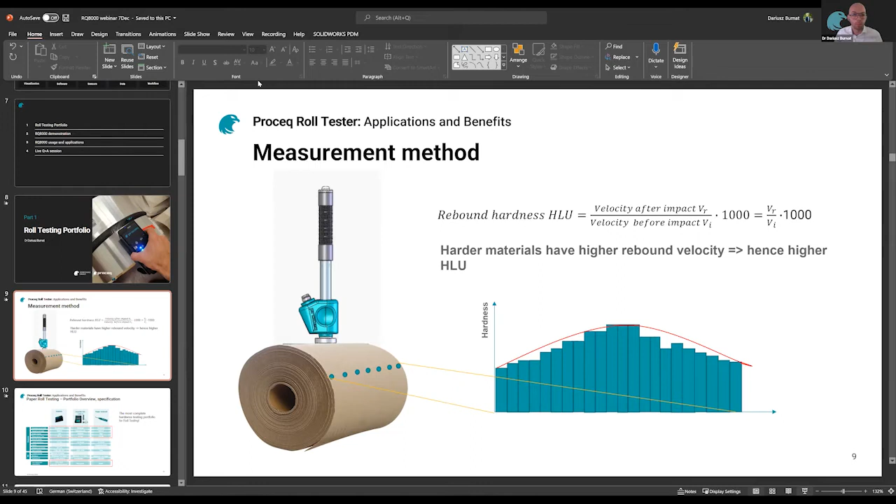Dariusz, could you share your full screen, please? We can see the presenter view. Oh, perfect. Okay, the floor is yours. And the audio, Dariusz. Right, perfect, perfect. So apologies for this little inconvenience.

I would like to welcome everyone in today's webinar. I hope you will enjoy the presentation that we have prepared for you. Today, we will show you how you can improve your quality processes, how you can minimize your waste of materials, machine downtime, and gain higher customer satisfaction. Before we jump in, I would like to very shortly discuss and show you how the hardness testing of rolls works on a very simple example.

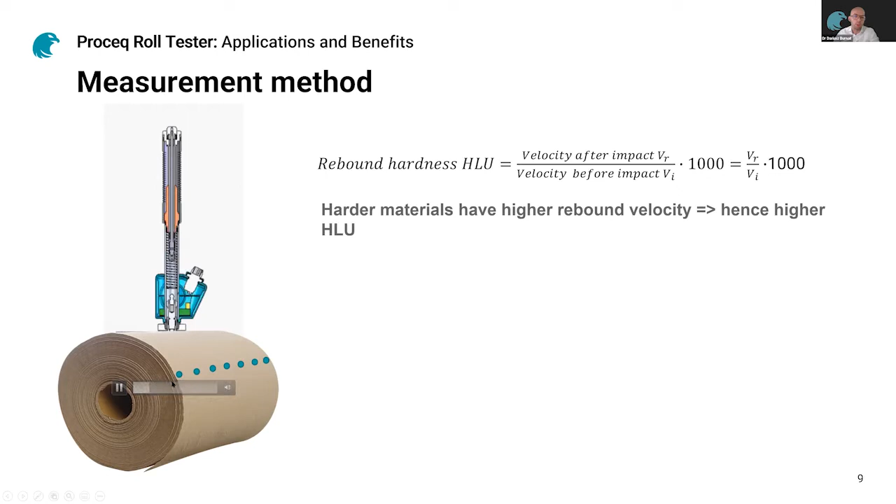Here what you see is the roll, and for this exercise we will use our Leeb method that is based on the rebound. The hardness testing principle works in a way that a specific device, which is here a coil, loads a hammer, or in this case an impact body, and shoots this against the surface of the roll. What is then done is we collect very specific points across the entire roll, and when we collect that data, as a result we receive a hardness profile. In other words, we can really scan the entire roll and see what areas are harder or softer, and later on we'll show you why this is of high importance for the roll processing and roll manufacturing.

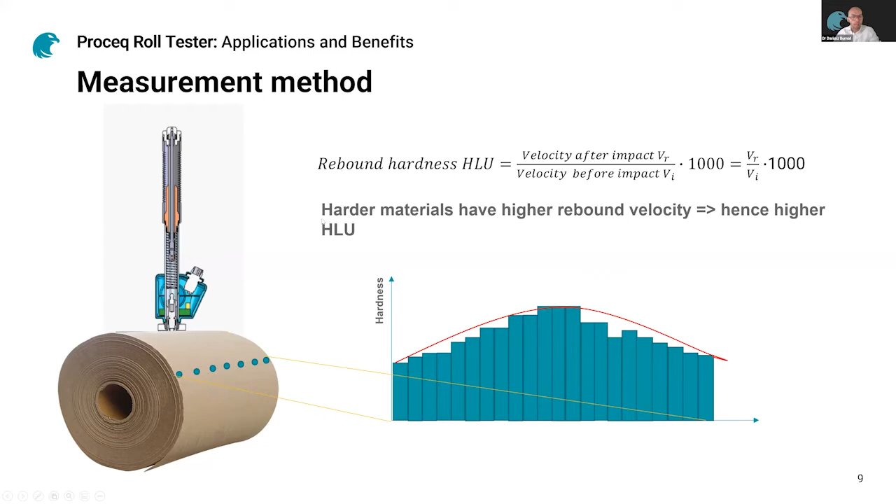In this simple example, we'll see how the HLU values are calculated. This is one of our products. In other words, what we measure is the rebound velocity. Let us now jump very shortly to our portfolio.

We're proud to announce that Screening Eagle Technologies, Proceq, has the most complete hardness testing portfolio on the market. We have three main products: the RQ8000, our very recent product that we have launched together with our technological partner Tapio, the Equotip 550 Leeb U, and the PaperSchmidt. Let me very shortly discuss the differences of these testing devices and what device would be best for your application. The main measurement principle for these three methods is the rebound.

However, the RQ8000, the product that we're going to concentrate on today, uses a slightly different feature, which is deceleration. In other words, we measure the opposite force of the acceleration, so how much the impact device, in this case the hammer, is being slowed down.

All of these three methods have slightly different sampling principles, starting from the RQ8000, which is measured optically, then the Equotip 550 Leeb U, which uses an inductive coil, and the PaperSchmidt, which uses an optical sensor. Now, the third option I would like to discuss is the impact energy, starting from very low impact energy through medium up to high, and the measurement frequency.

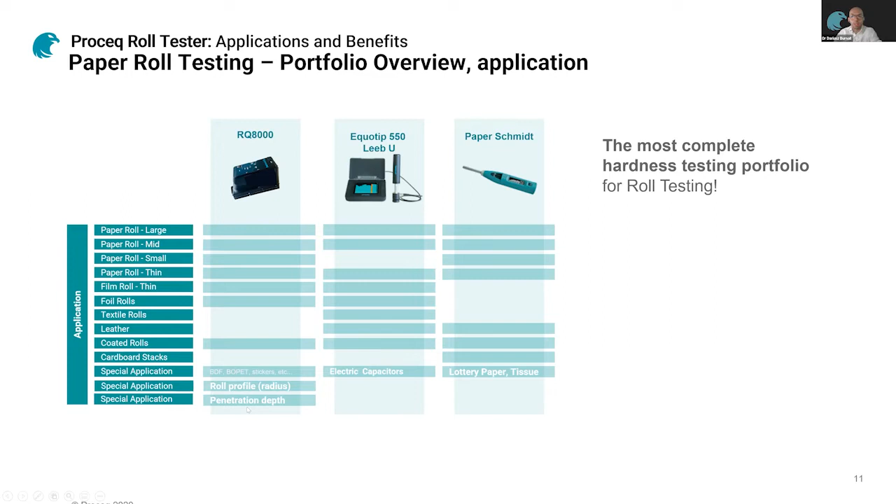Now let's jump to another slide to highlight what these devices can offer. First, cost savings. Hardness testing of rolls enables fast and easy detection of defects before they accelerate, or before you process the roll to the end, before you ship it to your customers. Because you can react early, you can generate massive savings on raw materials, machine downtime, and manpower, and you know well how this can increase material cost and the entire processing.

Not to mention customer satisfaction, because at the end you have fewer warranties and fewer problems with processing. Also, all of our devices have very good user independency—if you pass a device to another user, you will have similar or exact same results. And because all of our devices can test multiple materials, starting from paper to cardboard, aluminum foils, and plastic films, they are suitable for clients across the paper and roll testing industries.

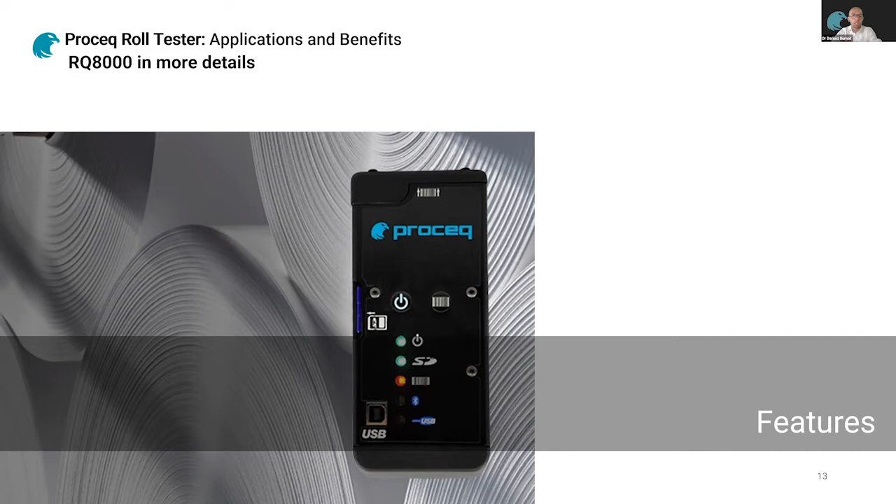Now let us jump very shortly to the application and benefits of our main feature here, the RQ8000, and I will briefly highlight what this method can offer and its specific features. Here on the right-hand side is a presentation of our device. This is the RQ8000, exactly the same device which I'm holding in my hands here.

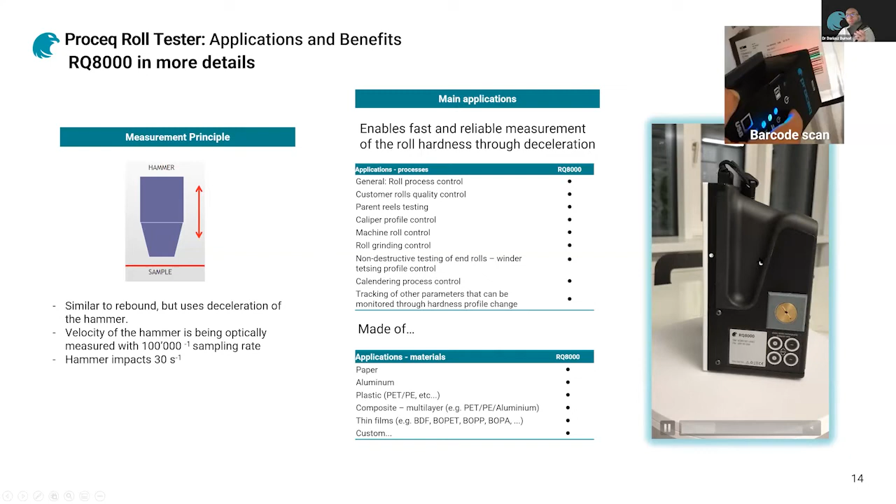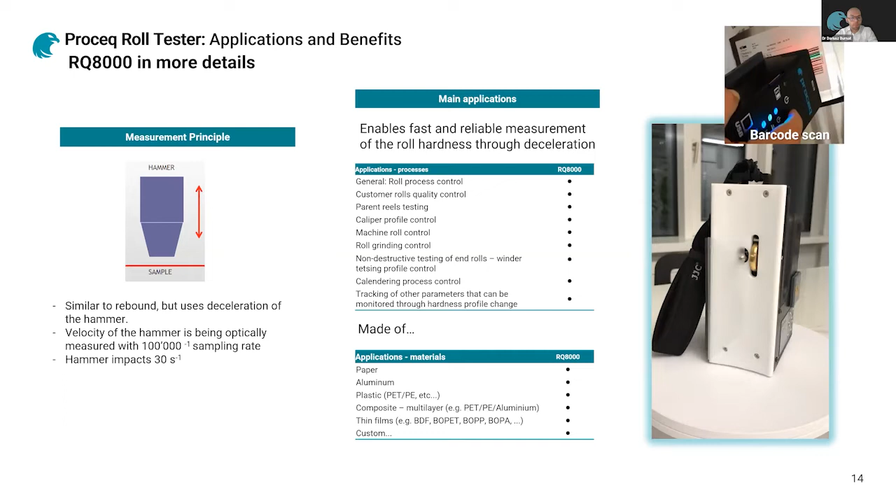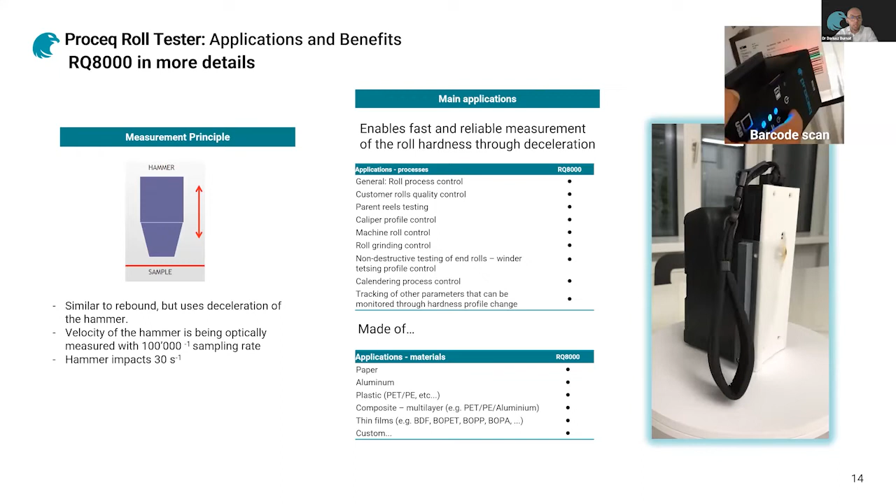This device is similar to the rebound method but uses deceleration. Nevertheless, it also has the feature to measure exactly in the same way as the Leeb or Paper Schmidt, which we'll highlight later. This device has extremely high resolution, optically measured with a very high sampling rate. Now the question is, what can you use it for?

The device enables reliable measurements of rolls through deceleration, and you can use it for practically any part of your quality processes—starting from roll processes, customer roll quality control, parent reel testing, machine roll control, and non-destructive testing of end rolls. As for materials: paper, aluminum, plastic, composite materials, and films—all of these can be addressed with this device.

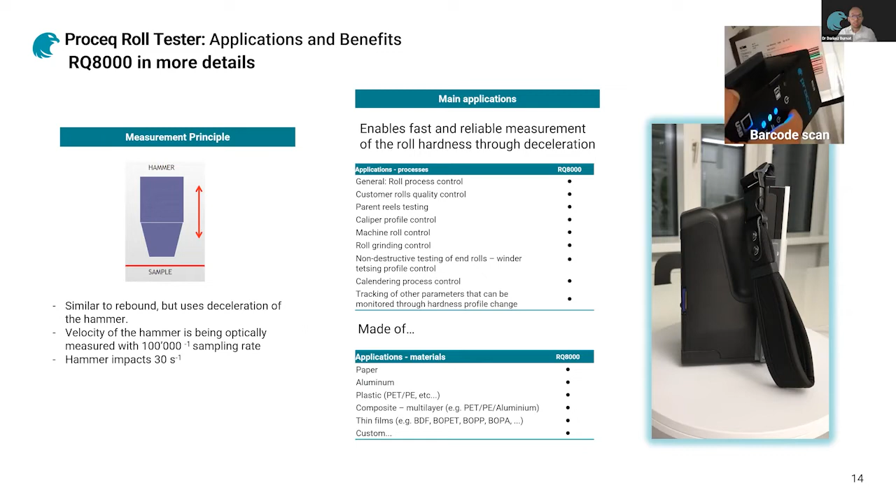The device also features a very simple user interface, because it has just two buttons: the power button and the scanner.

This is the top of our device. On the left-hand side, you see the USB-A/B slot, which allows you to transfer your data through the cable. If you wish to transfer through the SD card, you can remove the card and plug it back into your device. The device also uses Bluetooth if you'd like automatic data transfer, and you can use this in line with a tablet, so your data will be displayed almost instantly.

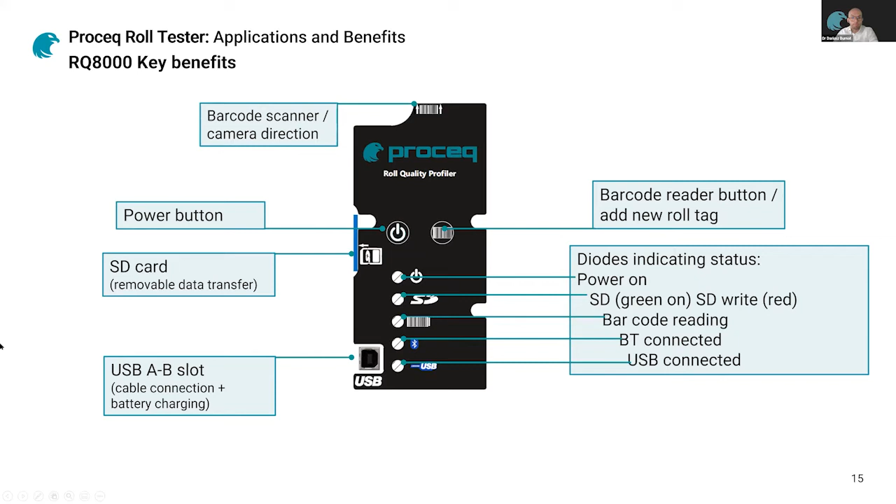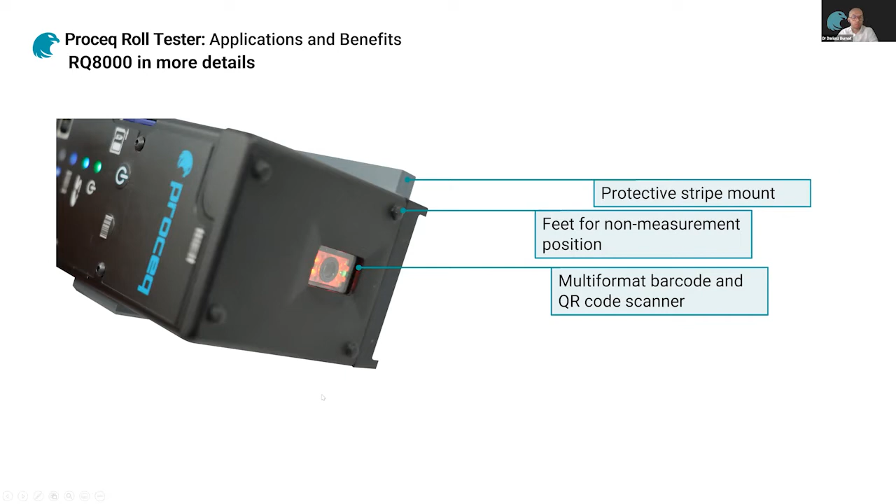Now, the key benefits of our device: automatic data acquisition and transfer. Because the RQ8000 is a fully automatic device, the only thing you need to do is place and scan the roll. Kim is going to show you this a little bit later. What does this give you? It eliminates human error during the measurement, because it's as simple as place, scan, download the data.

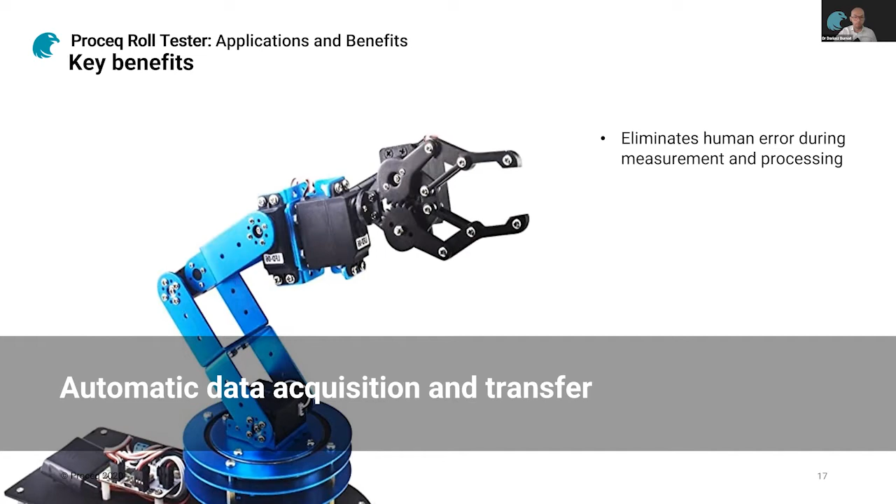Another thing is very low impact. It's delicate yet sensitive, so it allows you not only to save the surface and minimize potential waste of material during measurement, but it's also especially designed for delicate and sensitive films, which are complex and expensive.

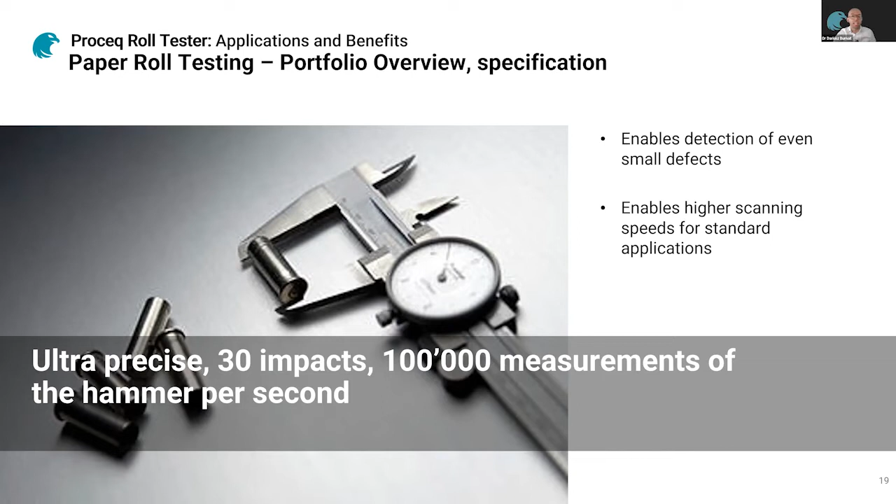It is ultra precise because it hits 30 impacts per second, and the hammer of this device is very precisely measured. It provides detection of small defects, and you can also have different scanning speeds. The average recommended scanning speed is 30 centimeters per second, but with a simple roll, you can go up to 50 centimeters per second. It's you, the customer, who decides how fast the roll can be scanned.

The last feature is cost and effort efficient implementation. Not only does the device have all the features you're requesting, it's also very easy to integrate, first because of Windows 7 to 10 compatibility, so it supports PCs from the past with no need for extra expensive devices. It also supports a tablet, so low-cost Windows 10 tablets can be connected. We also have standard AA rechargeable batteries, easily accessible anywhere without major cost. Last, the weight of this device is 1,250 grams, allowing one-hand operation, which is practically nothing for such a fully automatic device.

We also have a Bluetooth feature, so you don't need to connect through the cable if you don't want to. The data can be transferred automatically to the device you're operating with. All of these features allow you to tune your device exactly to your needs.

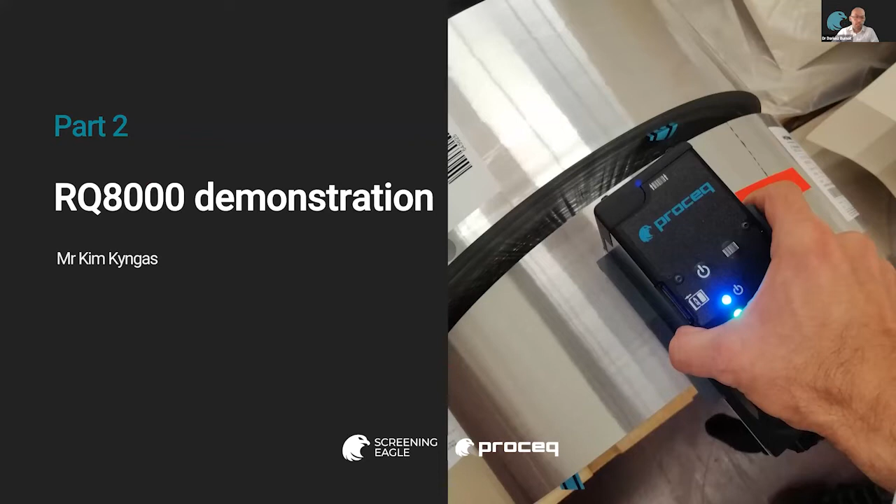Now I'd like to move to the demonstration, and I'd like to welcome Kim Kyngas, who's going to show you how this device can help you and how easy it is to use. In this presentation, we'll discuss how to initiate the device, how to start the software and configuration, how to go through the measurement procedure, and how to manage the data. Kim, the stage is yours.

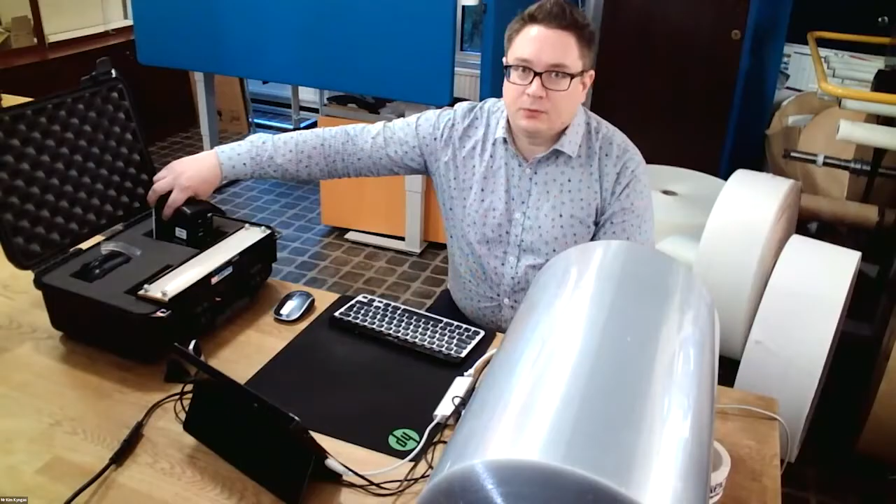This is Kim Kyngas, Operations Manager of Tapio Technologies, and here we have the Proceq RQ8000. I will go through in this presentation how to make a simple measurement and also show you some of the features of the RQ8000 software.

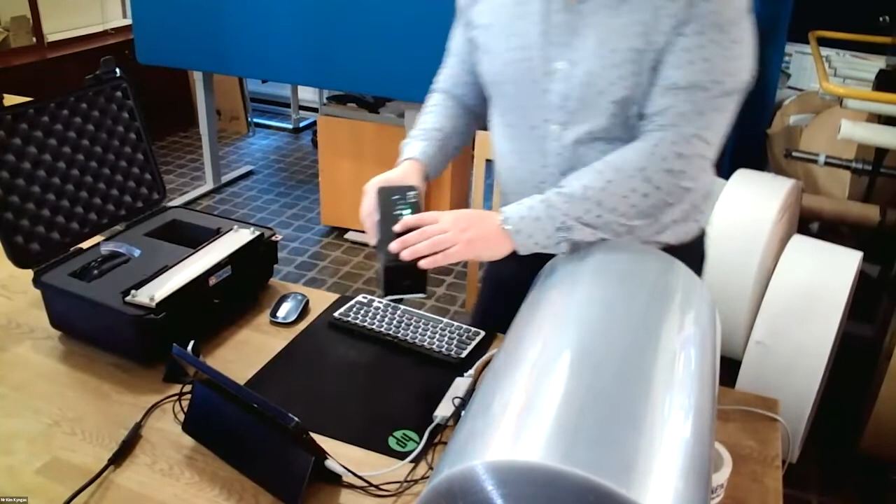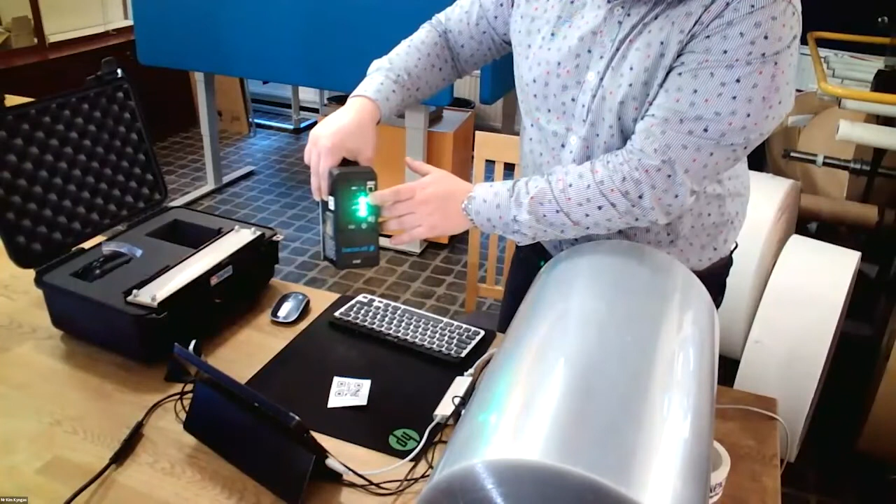So here we have the barcode reading feature of the unit. So we have a barcode for the roll, and with the red green LED blinking, we have a successful barcode reading.

We just place the unit right on the edge of the roll, so we can measure right from the edge of the roll all the way through the roll. For this presentation, we have a PET plastic roll, and we also measure paper and film.

We recommend to measure 3 times, so we are sure that the measurement is successful. We have a comparison of 3 profiles, and they will show on the computer.

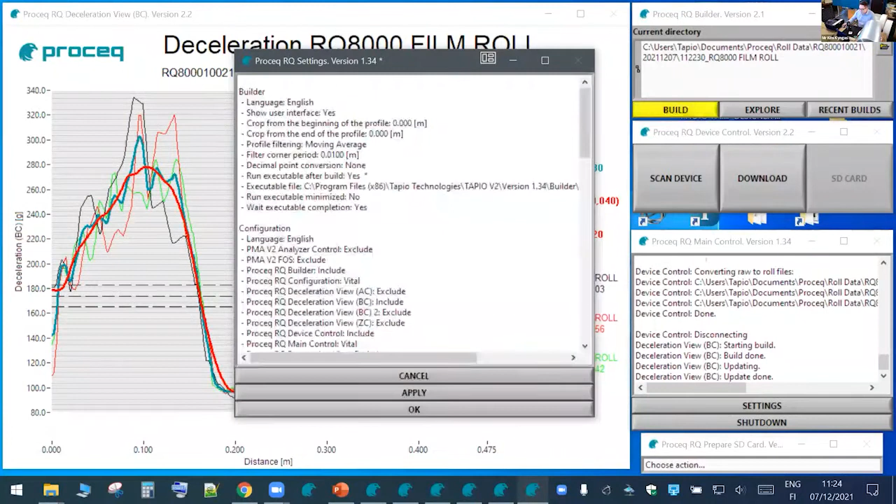We also have a way to automatically open the measurement in the text format, so we can export it to Excel. We have an automated opening text, and after the measurement is transferred, it is automatically opened in the text format. In this measurement file, we have all the measurement points in tab separated text format.

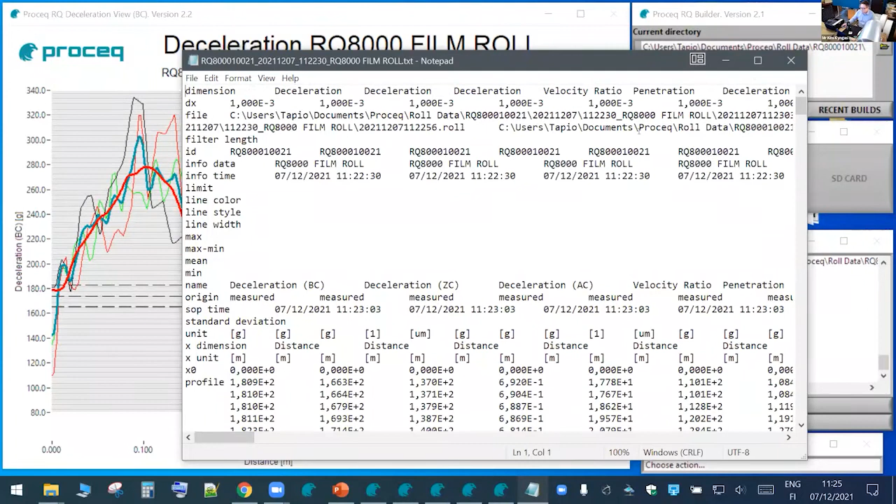We also have a calibration sample which can be used for checking that the measurement level stays the same during the years. So we have the barcode here, successful reading, and then we gently measure the sample 4 times, so we have more data to be filtered.

Here we have the measurement itself, so barcode, and the measurement of the calibration sample. And the calibration sample profile will show that the measurement level has stayed in the original level, which we will see here.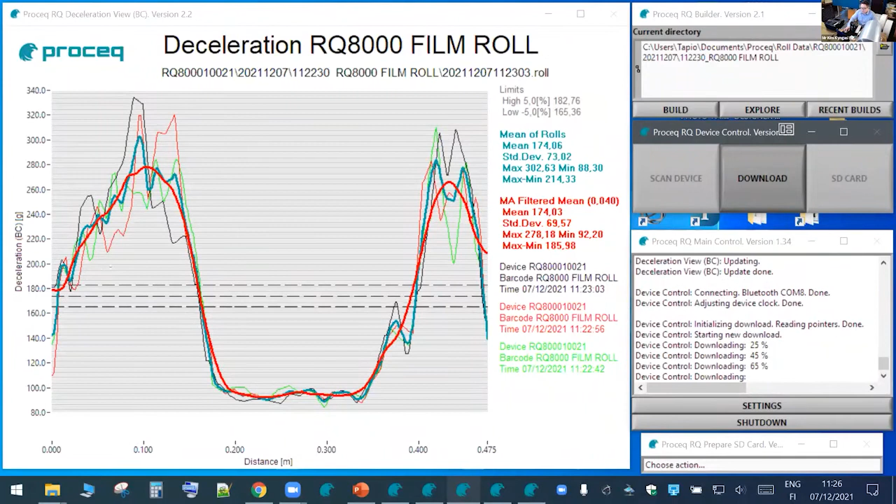And also the text version of it. Now we have it automated.

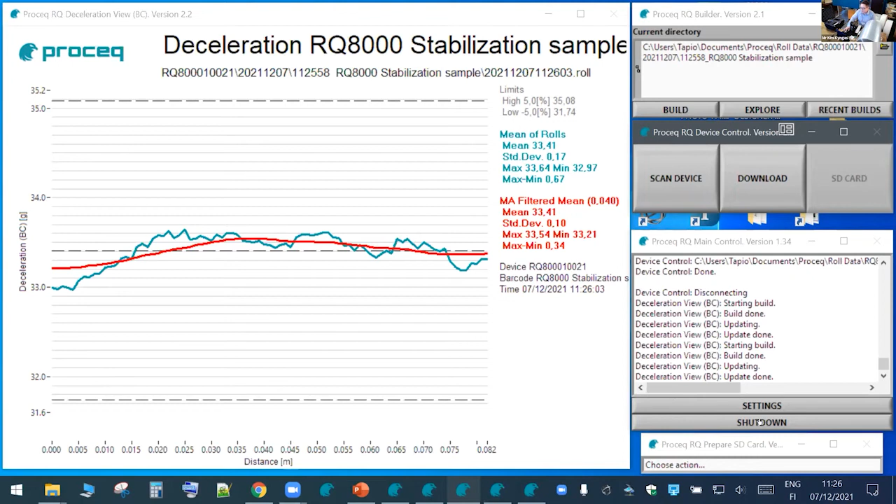So that concludes the short presentation on how to measure with the RQ8000. Thank you.

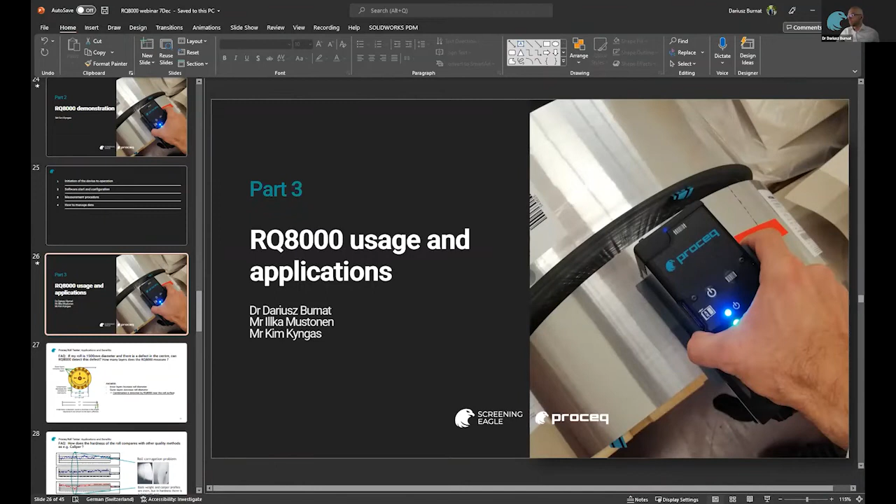The very first question would be, how many layers does the RQ8000 can measure? So many customers ask questions similar to what is the penetration depth of this device, whether we can detect defects really at the core of this roll, or basically we are just measuring the hardness.

And I'm recalling right now a very interesting discussion with Ilkka. And this slide actually shows you the phenomenon which is being taken place during the roll manufacturing. So, in short, actually, the roll consists of many layers.

While winding or preparing the roll, there are inner layers, and there is another layer coming, and layer after layer and layer after layer. And I like to quote Ilkka, who said that the inner layers, if they had entire power in the world, they would explode. But the next layer, the incoming layer, actually keeps all the layers together.

If you have a defect that emerges somewhere in the middle of the roll, that means that the compression forces will accelerate the problem or the defect, and the hardness within the profile will be somehow multiplied. And it is somehow available quite near the surface.

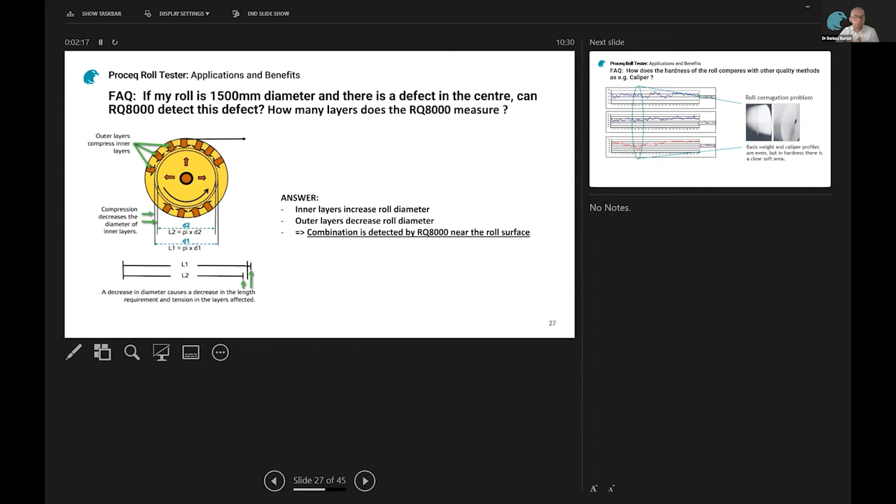If there is something wrong with the roll, for example, in the middle, you will see it at the surface, because the problem might not originate from the surface per se. It might be actually located somewhere in the middle. Of course, the profile will show you the combination of the roll and the defects. But if they are defects, certainly you will spot them at the surface. Hence, the surface measurement is the method which allows you to detect them and spot them very early.

Another comparison, and here I would like to ask Ilkka to tell us a little bit more, because our technology partner is also specialized in QCS systems, which measure basis weight and caliper. Ilkka, can you please tell us something about the comparison between QCS and hardness testing? What are the benefits of using hardness testing compared to the QCS systems shown here, for example basis weight and caliper profiles?

Thank you, Darius. Yes, here in the graph you will see the blue profiles, and those are measurements from the QCS system. There is basis weight on top and the thickness profile in the middle. And then we have the red profile for hardness.

It is not 100% clear how the differences appeared, but the basic phenomena for QCS systems is that they are set up for process control, and there is usually some filtering involved, so that very short-term variations are not so clearly seen. This is an example where the customer had some roll corrugation type problems, and they were not able to see it in the QCS basis weight and thickness profiles, but it was clear on the hardness profile.

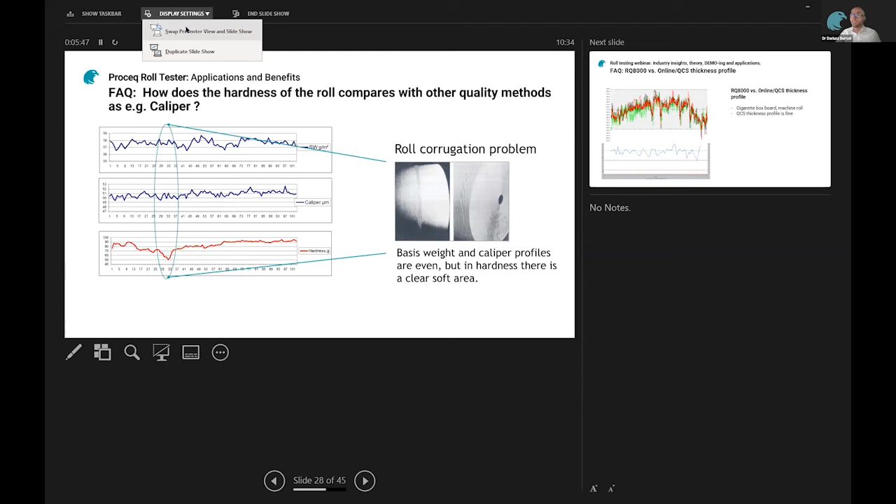This is again the online QCS thickness profile, and this is an example from a cigarette box machine roll in comparison with QCS thickness. So here, am I correct, Ilkka, that the entire profile roll is practically missed by the QCS systems, whereas the RQ8000—because this data comes from the RQ8000—would clearly show the profile and how it varies across the roll?

Is that correct? Yes, this is a perfect example of the sensitivity of roll hardness. You will see two clear spots right in the middle of the hardness profile, which are completely missed by the QCS system. You will also see more dropping hardness values on the right side of the profile, and those are the really problematic areas.

When the hardness is changing rapidly, either way, those are the major concerns for the end user of this paper or board. It just goes to say that the QCS system is averaging the data, it's moving faster, and it's measuring just one layer of the production, whereas hardness measures multiple layers, and that's one of the reasons the sensitivity is so much better.

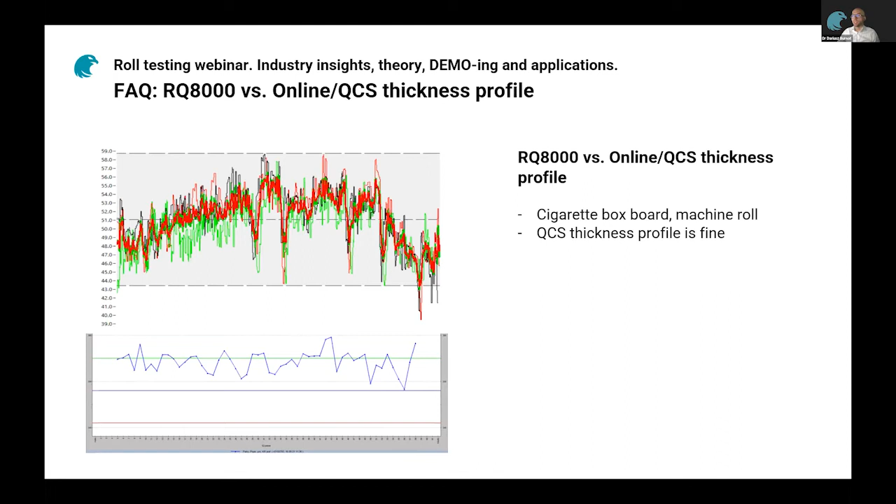And for this particular roll, the RQ8000 would be the product we would advise. Important to highlight is that the values are arbitrary. One should not compare, for example, values measured with our Equotip 550 Leeb U, which measures in HLU, but rather compare the entire roll.

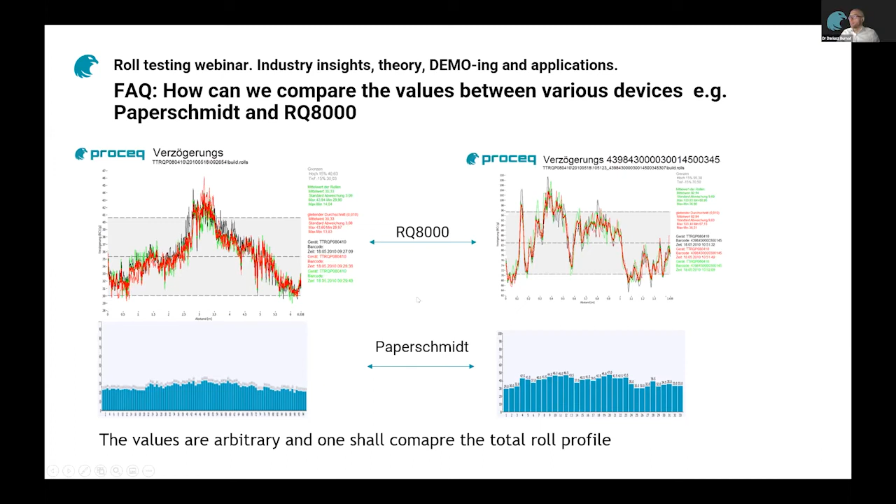That was more or less another way to say what you just explained. Another comparison between the Paperschmidt and the RQ8000 is also displayed here. This is also clear, perhaps a better example that both profiles are being measured. You can see, for example, here there is a hard spot or harder node, which is also reflected here at the bottom, and the profile matches.

So both devices could be used. Nevertheless, for this particular material, this device would show you higher resolution and would highlight the spots, the defects, the problems you want to find out better.

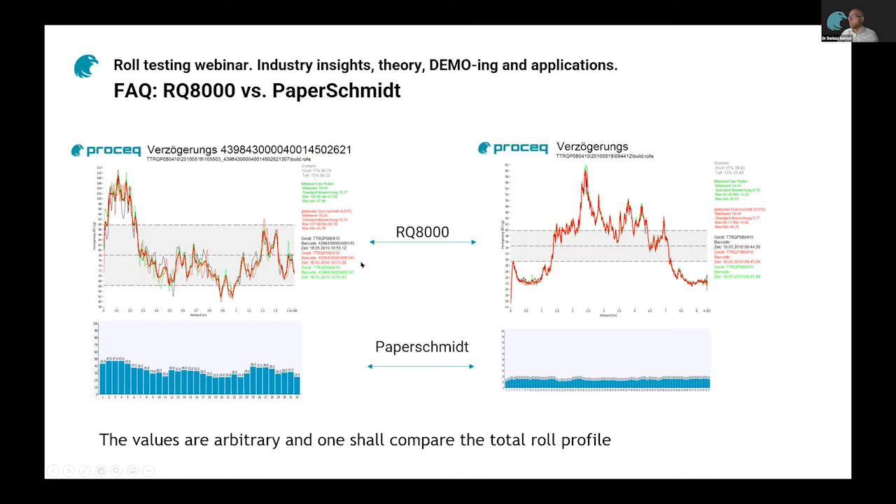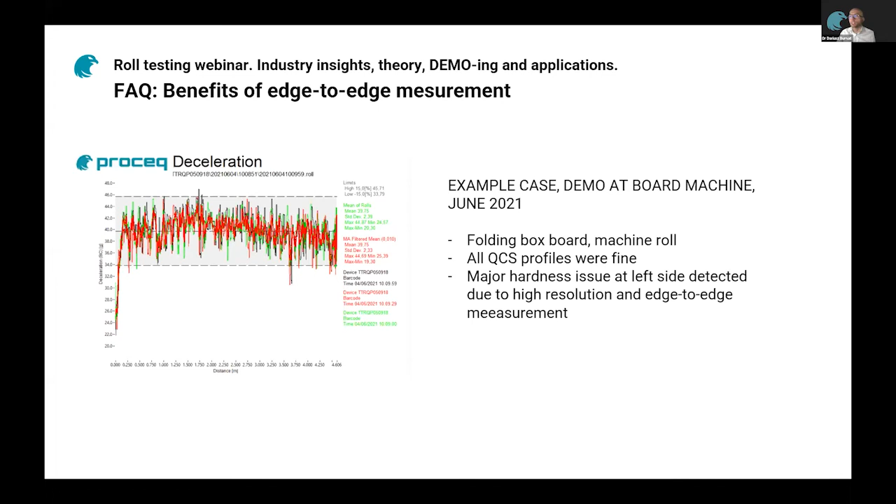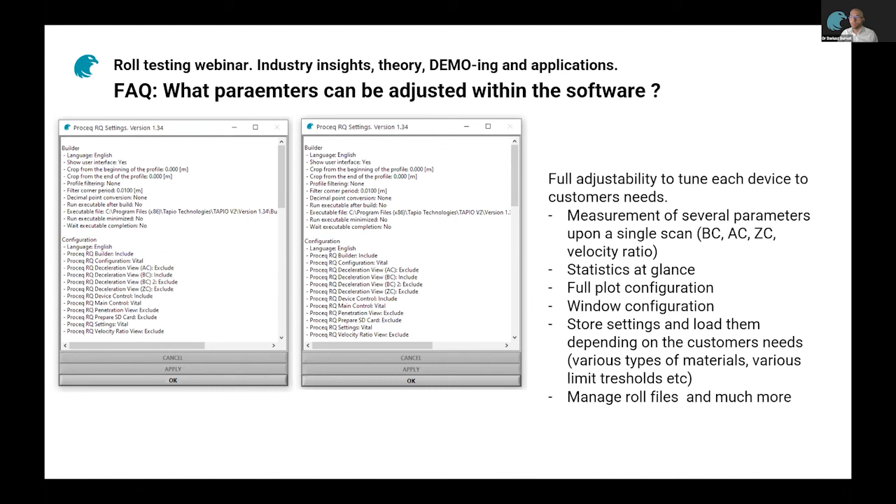You can also store settings and load them depending on customer needs. For example, if you have constant products and recurring customers, you can set up the settings precisely for this material and for that machine. You also have statistics at a glance, you can filter them, process them, and manage your data. So this slide shows only a few parameters you can fully adapt to your processes at your factories, plants, and mills.

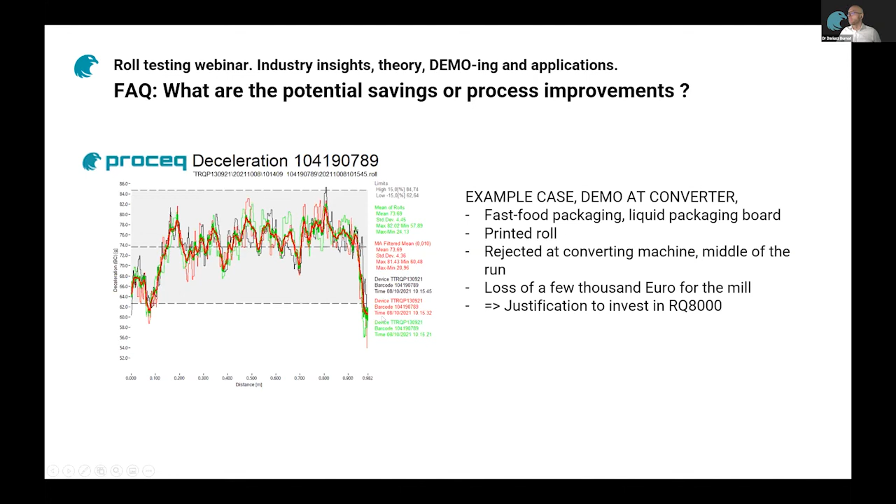I understand. This is an excellent example of potential savings and how to gain customer satisfaction, having fewer problems with the process and more control over the process. I have also a last slide to show in this Q&A session before we jump to the live Q&A session.

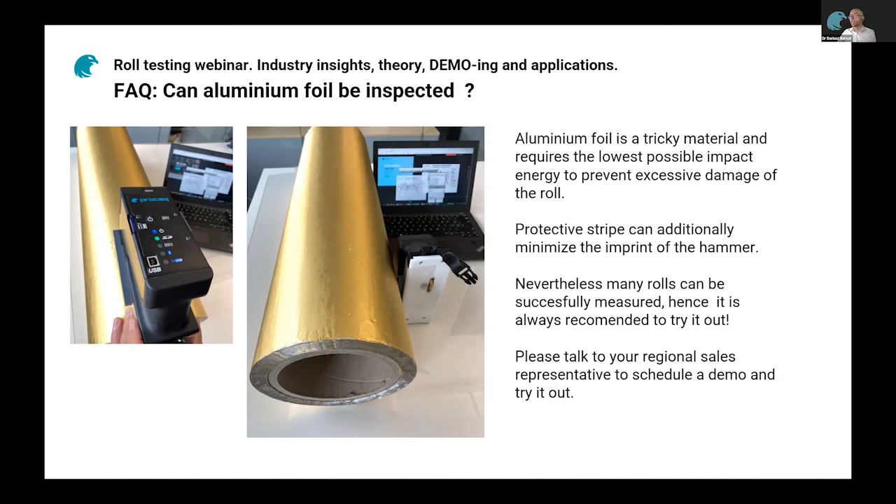I understand, thank you very much. This was the last of our commonly asked questions by the customers. With this in mind, I would like to go to the next part of our presentation.